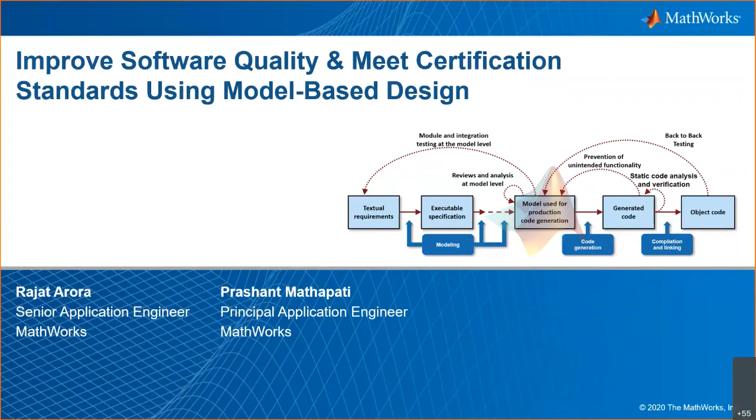Rajat, you're not audible right now. Yeah, now it's good. Is it fine? I have a weak internet connection at this point, so let me know if I'm audible fine. Yeah, sure, now it looks good. Continue, please.

Okay, so like I was saying, one of the biggest challenges we're seeing is that the technologies around us are maturing and coming up at an exponential speed, and at the same time we have to meet a lot of standards that are cutting across our industries, whether it be ISO 26262 in automotive, DO 178C in aero, or other standards for other industries.

All of these projects, especially the safety critical ones, tend to be more costly over time because they don't just involve the regular process of developing the software or final product, but also involve making sure the product, whether software, hardware, or a combination, is safety relevant and handles all the safety critical use cases the system might encounter. This makes our projects more critical, and we need to make sure they are defect free.

We've also seen this over time, and there's a NASA study on the same, that the later you find defects in your process, the more the cost of fixing them increases.

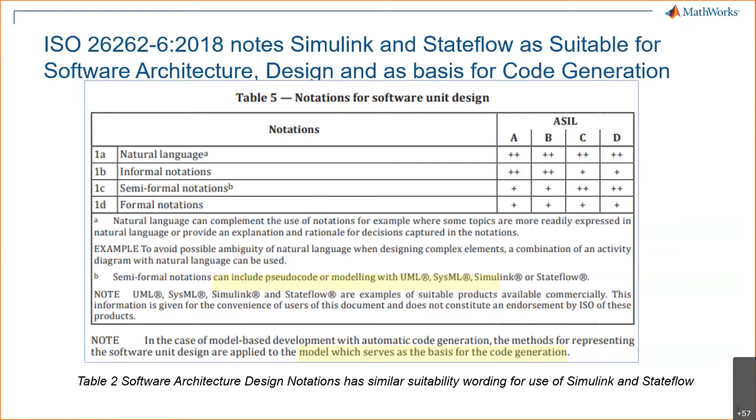So how then can we proceed when it comes to ISO 26262, and where does Simulink and model-based design apply when it comes to ISO 26262? As we all know, in terms of ISO 26262, the entire standard is divided into 12 chapters.

And mostly the most relevant chapters, as you can see in front of you, are chapters 4, 5, 6, 8, and 11 from a model-based design point of view. Primarily, chapters like chapter 6 are the most important and most relevant from a model-based environment point of view. And that's what I'm going to cover as part of today's talk as I move on.

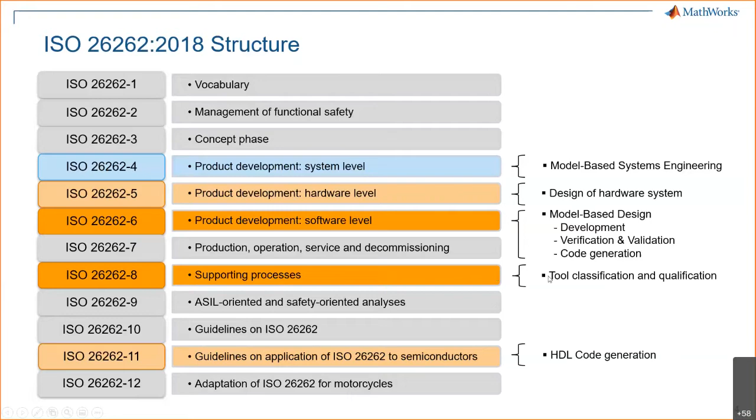But along with that, another area which is of utmost importance, both from an ISO point of view and from a tool vendor point of view, is how we support you in the entire process of developing a product or software compliant to ISO 26262. That is basically by providing you all the relevant artifacts and documentation required so that the tools you use from MathWorks can be easily qualified for your particular projects following the ISO 26262 standard. So that is another part I'll be talking about later, which is the tool classification and qualification part.

So let's first do a quick deep dive into the ISO 26262 chapter 6 coverage that we have. We all know that the ISO documents, especially chapter 6, is full of tables which specify how you are supposed to go ahead with your process of software development, whether at the unit level, the architecture level, the implementation step, or the testing step. All these details are provided by ISO in the form of these tables, and these tables are also partitioned according to the ASIL levels.

So not all components would be at the same ASIL levels. The lowest would be at A, and the highest or most critical at D level. As you can see, there are about 15 or so tables inside the chapter 6 document, and each of these tables have their own subsections, or you can say sub-guidelines, into it.

As you can see, one of the tables I have over here is table 9, which talks about structural coverage metrics at software unit level verification basically. And again, this is just one of the tables. There are many such tables in the ISO document.

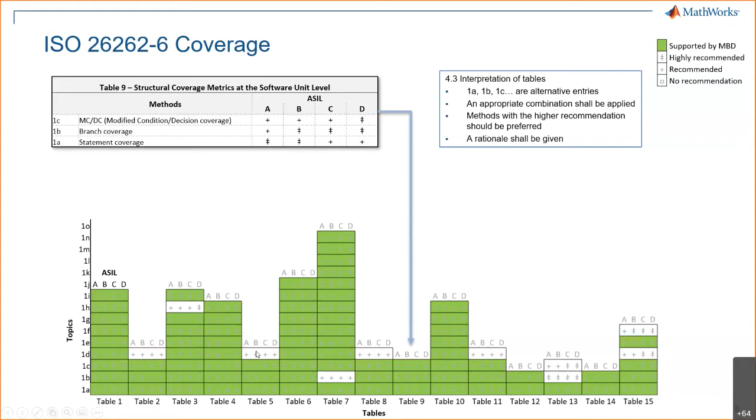And essentially, if we do a deep dive into these tables, we'll realize most of them are not relevant from a Simulink or software perspective that MathWorks is providing. So one of the tables is table 2, point number 1D, which talks about formal notations. Simulink is a semi-formal notation language, so it does not qualify this one. But again, this is not a hard-coded requirement, it's a recommended requirement.

And then there are some other points that require more manual intervention, even from an ISO point of view. For example, there is something called pair programming, which requires some sort of manual intervention. And then there is error guessing required in table 8, point 1D. Again, this is something which requires manual intervention.

There are a few other points or tables which again do not fit exactly into the software tools area, but can be achieved outside of the MathWorks tools environment, which is basically like using ECU network and the complete infrastructure to test some of these things, and also even doing vehicle-level testing. So these are few things where we do not play a role, but in most of the other cases, we have a clear-cut role to play and we support in most of these areas.

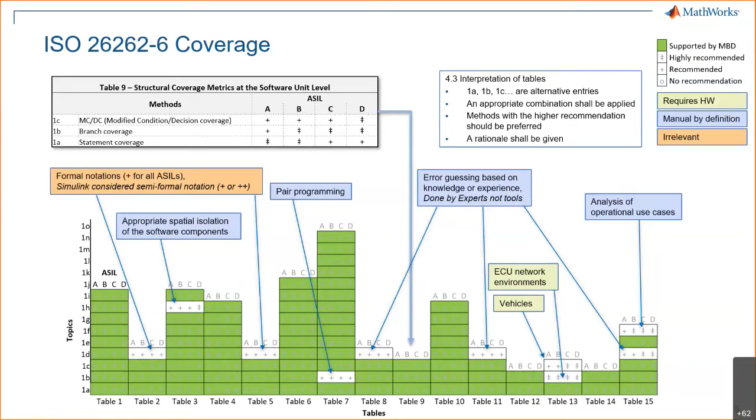Moving forward from here, not just ISO 26262 - MathWorks and the products that run on top of MATLAB and Simulink, by using these products, we support all the other standards that are there for different industries as well. So apart from ISO 26262, there are other standards for other industries like DO-178C, which is relevant for aero, and a lot of other standards. For most of these standards, along with ISO, we provide something called a certification kit.

Now, the certification kit, basically the IEC certification kit from an ISO perspective, will provide us with all the relevant artifacts required to qualify the tool and qualify the process that has been used via these tools to develop the entire software for the product that you're developing. So it has all those artifacts, so that at the end of the day, when you have used all the products as part of the workflow, you can run the artifacts.

So there are use case test cases that can be executed, and finally you would get a report out of this, and this report can be submitted to the auditors so that you can get your tool also certified at the same time. Again, we understand it is hard to digest this straight away. But to give you more confidence, we have also done a pre-qualification kind of a thing at our end.

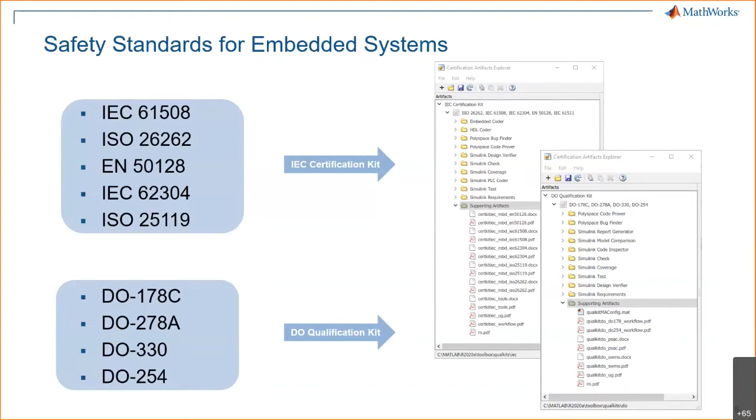So most of the tools that are used in the ISO 26262 process that you would be encountering, and I'll be talking about as I go ahead, have been pre-qualified already by TÜV for most of the ISO development ASIL levels. And I'll be talking about at what TCL level they are at a later point of time. And similarly, it is also relevant for the DO qualification kit, and the products that are used in the DO workflows. Okay, now this was about ISO and how we support ISO by providing these cert kits.

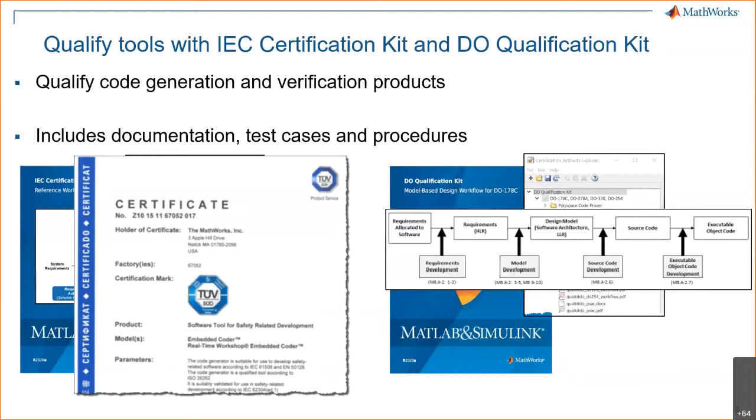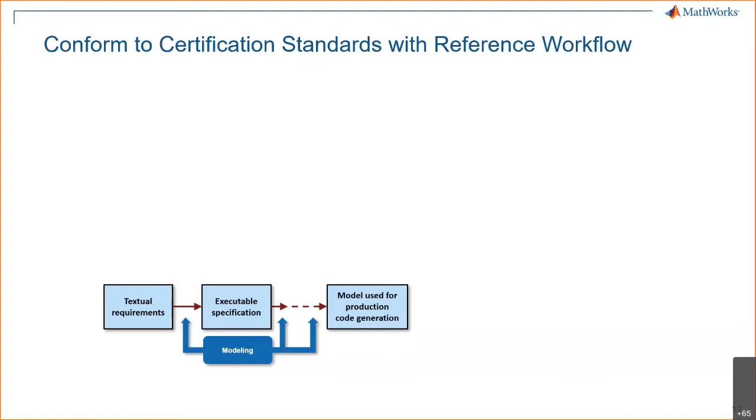We have created this model, and now we will start verifying this model and making sure that this model meets exactly what our textual requirements had asked us to do. And this can be done both at the unit as well as at the integration level also.

And once you have analyzed that your model, which is now ready for code generation, is meeting all your requirements, you would also make sure that the model that you have prepared follows certain guidelines or certain best practices that are required for developing the models, and that are required to ensure that the code that gets generated is the best possible code that you can get, and also follows the guidelines. Now, once you have done this, you can move to the next step where you would generate the code.

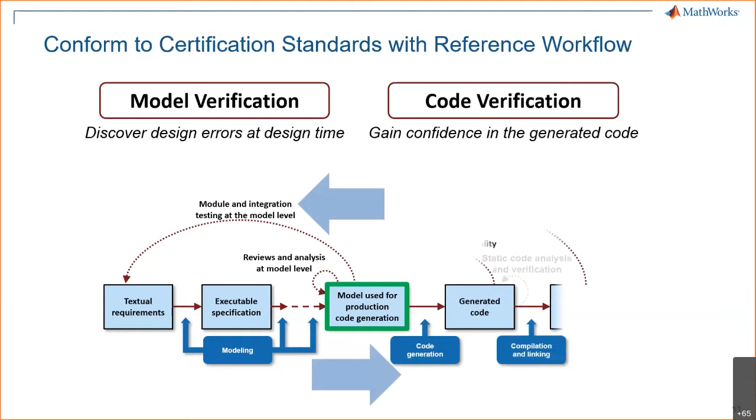And again, the process doesn't stop there. The generated code will again then be back-checked with the model that you had developed earlier. And both the model and the generated code will be validated against each other using the same test cases that you had earlier used to validate your model. And if the generated code gives the same results as the model, then you can essentially say that your code generation process is a success.

And at the same time, you would also be doing some sort of static code analysis and static verification on the generated code, which will basically ensure that your generated code is following the guidelines that are required. Okay. So this is typically a reference workflow that is used in the industry or organizations which are using model-based design, and is also a reference workflow that TÜV SÜD has accepted for development of ISO 26262 software using model-based design.

So let's have a deep dive into this workflow and see how each of these steps can be done inside model-based design or inside MATLAB and its related products. So let's look at the first side of things, which deals with model verification. Okay, so I'll continue, sorry.

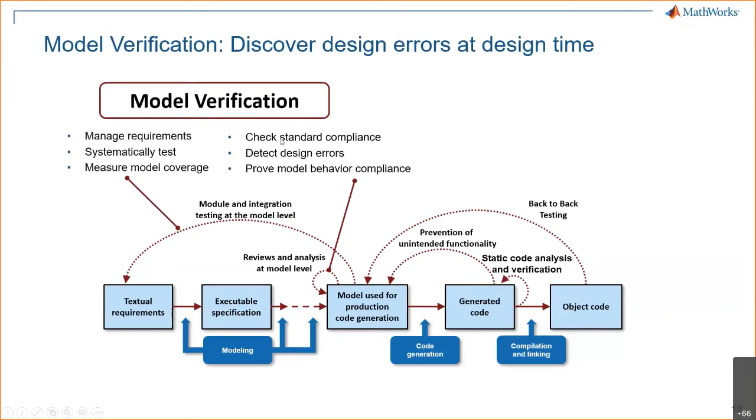So model verification, like I said earlier, encompasses 3 to 4 kinds of primary things that you would be doing. These are managing the requirements, making sure that the design is working according to the requirements, measuring how much of your design has been tested, and making sure that the model that you're developing is according to certain standards and does not misbehave in any scenario whatsoever. This forms the model verification part, and this is what we will start off with in this workflow.

On the other side of things is the code verification, which deals with things like making sure that the generated code matches the model results, or both of them give exactly the same results. And again, you get full coverage, making sure that the entire generated code is tested, and also making sure that the generated code is free from any defects, and it also follows guidelines like MISRA. This forms the code verification side of things. So let's start with the first piece, which is managing the requirements.

So inside Simulink, and primarily using Simulink Requirements, you can ensure that all requirements are implemented. You can even create the requirements inside Simulink itself, so you no longer have to go to a third-party environment to author the requirements. You can author the requirements inside Simulink Requirements itself. And at the same time, you can ensure that these requirements are linked with the models and the code and the test cases that you are later on going to create.

So let's see how this process works. So like I said earlier, typically Simulink Requirements would be your central tool, which will help you in working with requirements.

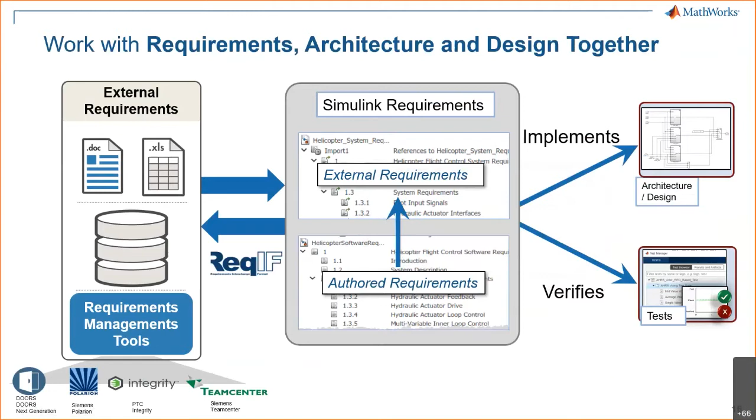And like I said earlier, you can basically link all these requirements via Simulink Requirements back to your design, to your architectures, and to your test case, and even go on and link all these requirements automatically with the generated code too.

And let's say if you have pulled in the requirements from some third-party environment, which is like a doc or an Excel or some of the third-party tools, and let's say you have updated them inside Simulink Requirements or inside the Simulink interface, and you want to take these updates back into your original tool that you might be using, then we provide a seamless mechanism to do this via the help of ReqIF exchange format. This is a kind of a file format that is very popular amongst all the requirement management tools, and most of the requirement management tools do support this. Okay, so we can easily exchange the requirements between your third-party tools and Simulink Requirements via ReqIF if that's the use case.

And on the other side, if there are any mismatch of the requirements and the design, or if there are pieces in the design that are not linked, or if there are pieces in the test cases that are not linked with the requirements, you can easily again validate that and see why are they not linked, or if the requirements have moved, or if there was no requirement for that particular design piece or the test case.

Okay, so I have a quick video demo to demonstrate how this entire requirement management piece works. So let me just start this video.

Okay, I don't know, for some reason this is, oops. Okay. Okay, this is strange. Let me just see if it works. Okay, I don't know why this is not working. This is strange for me. Okay, sorry about that. I don't know why this video is not playing. So I might need to skip over it. Yes, unfortunately it is not, but quickly I can still use the screenshot to explain you. Let me just give it a final try. Okay, I apologize for this. I really don't know what's going wrong over here, but let me use this screenshot itself to explain you.

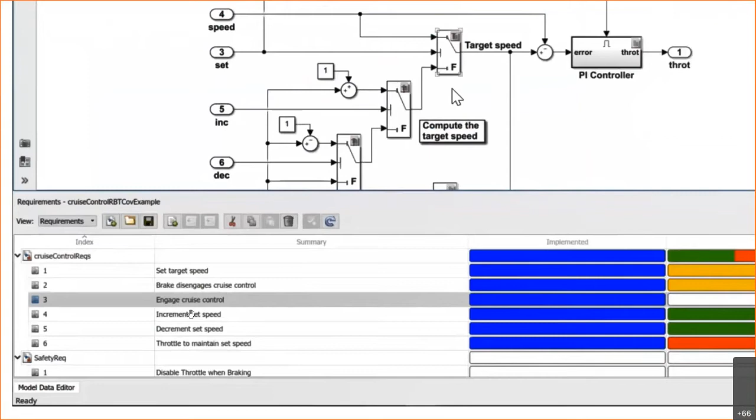Now, if I want to link any of these requirements to any of the pieces in my model, all I would have to do is just drag and drop this onto any of the pieces in the model. It's as easy as that. So I would just select this. For example, in this case, engage cruise control is selected. I would just drag and drop this, for example, on an AND, and the requirement would be linked with the design or the model that I'm developing.

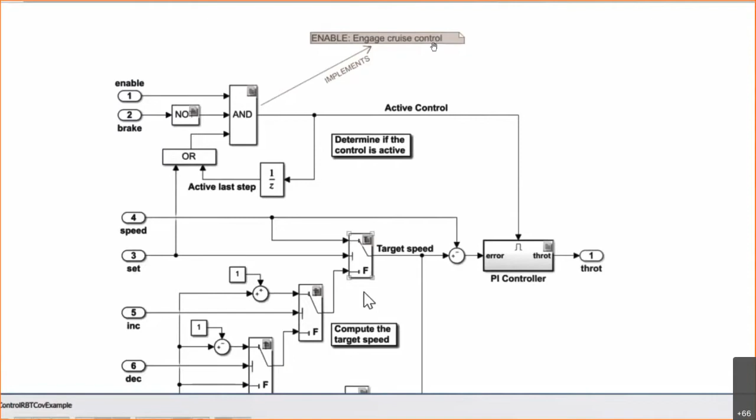At the same time, once the requirement has been linked with a particular element in the model, you would see that it will have these banners or these gray icons that are appearing on the blocks. So for example, on this AND block, if you see, there is a banner or a gray icon that is appearing. And if you would just click on this gray icon or the banner, it will show you what particular requirement is being implemented by this AND block. So in this case, this AND block implements engage cruise control requirement.

And if I just zoom out again, if you want further details about the requirement and what are the finer details of this requirement, on the right hand side, which is slightly cut out in the screenshot, sorry about that again, you would see the description of the requirement in detail. So that would be also there.

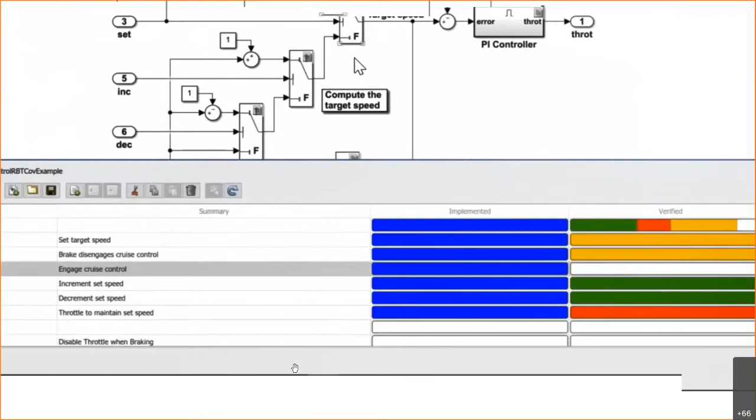And finally, the moment you start linking the requirements back with the model, you would start seeing the status of the implementation bar changing. So if a particular requirement is not linked with the model, it would show a blank status, meaning that no model element is linked with this requirement.

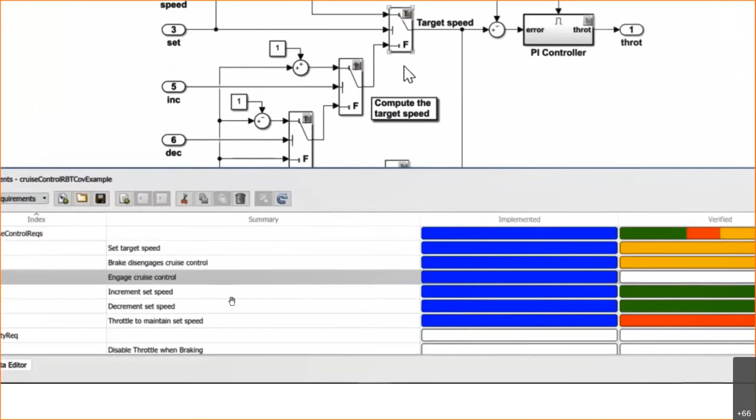And on the other side also, it shows the verification link. Basically, it shows whether a particular requirement is linked to a test case or not. So for example, in this case, engage cruise control is a requirement which is not linked with a test case. And in cases where the requirements are linked with the test cases, if the test cases are not executed, you will get a yellow kind of a display.

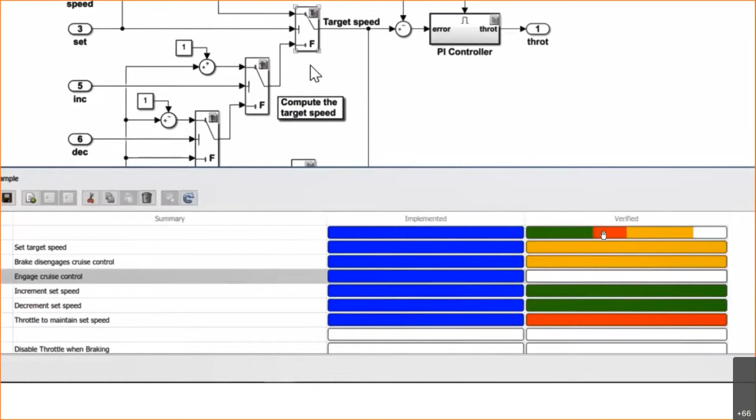But in cases where the test cases have been executed on the model, if they have passed, it will show green. If they have failed, it will show red. So in this case, if you see the sum total, it is showing that a few test cases have passed, a few have failed, and a few have still not been executed. And on the bottom over here, you would also see the links appearing for all the requirements. So this is how the requirement linking and traceability process works.

Let me just see if I can go ahead. Yes. So like I said, you can link the test cases back with the requirements, as I showed you earlier, and you get different verification statuses right here in the progress bar. And each color has its own notation: pass, fail, unexecuted, and missing.

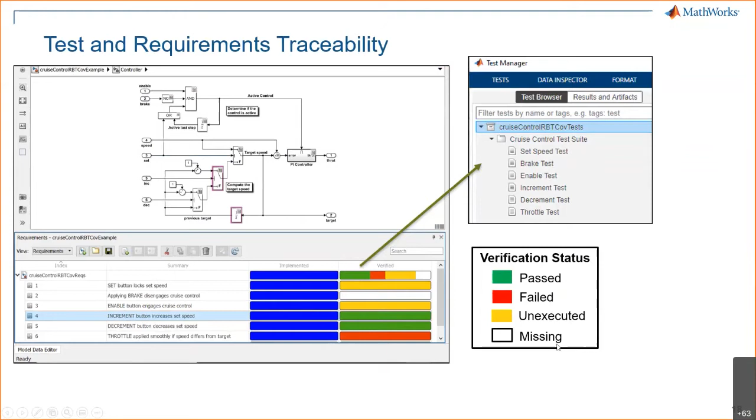Furthermore, when you see that a requirement is missing a link with the test case, starting with 2020A, we came up with something called a traceability matrix. This video, I don't know, all my videos are not working. So it gives me a matrix kind of view where I can populate all my test cases against all the requirements, or all my model elements against the requirements, and see which pieces are linked or not. So it's like an X and Y kind of matrix.

And I can see what pieces of the requirements are linked with the test case, or with the model or not. And if there are any missing pieces, I can directly establish the link from the traceability matrix itself. So for example, in this case, the brake requirement is not linked to a brake test case. What I can easily do is just double click on this and link it with the test case that I have already authored.

So this is again a very useful view, because as our projects and models start getting complex, it becomes hard to manage all these traceabilities in a single place. So this traceability matrix gives you the flexibility to visualize all the links established between the model, the requirements, and the test cases. And if you see any gaps in the traceability matrix, you can close those gaps, or review them and analyze why they are present in the first place. Let me just move forward with this.

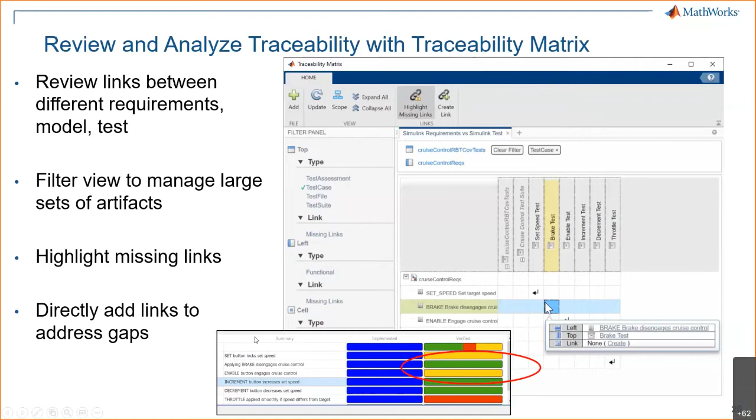So now we have seen how you can work with the requirements, the model, and the test cases. Now let's quickly look at how you can author the test cases. If you are on model-based design and using Simulink Test, you should be able to create an automated functional testing framework that is well integrated with all the tools inside a model-based environment, helping you do verification and validation of your models. This will help you run the test cases, find out which are passing or failing, and what coverage you are getting.

And finally, when you are working on large projects and large software systems, you can also execute all these test cases created via Simulink Test on continuous integration platforms like Jenkins. So all the test cases can be automatically executed on Jenkins or other CI platforms. So let's look at how this automated framework can be executed on the model.

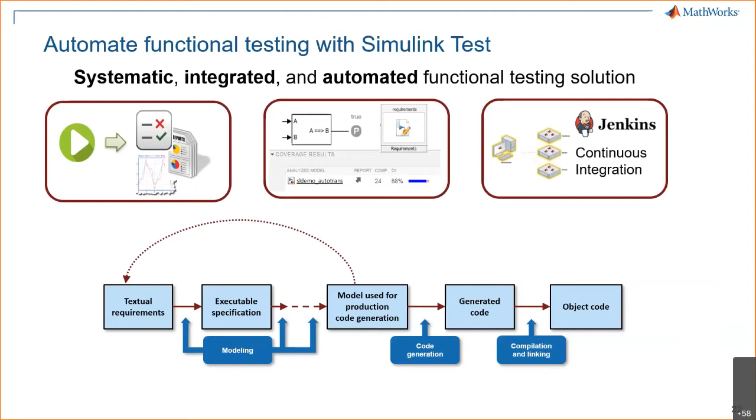So let's say you had certain functional requirements out of which you created a model. This model can be created in Simulink, Stateflow, or it can even be an architecture model linked further with an implementation model. So any of those three can work. So let's say you have created this model. Now you want to test this.

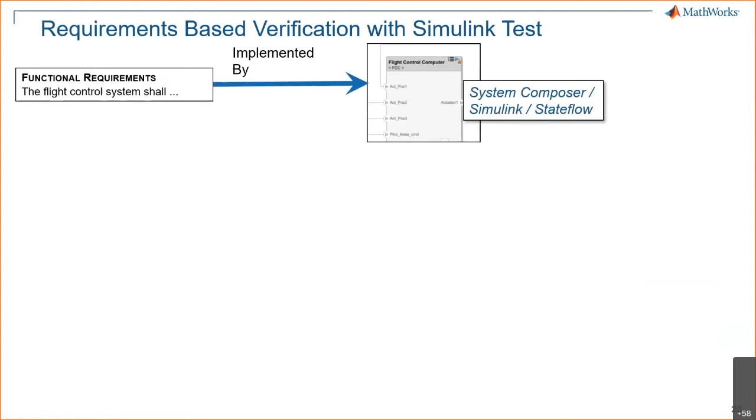So via Simulink test, you can first create a harness environment for this particular model. Basically, a harness is an isolated environment that will help you in testing the model or the design you have just created without altering your actual design in any way. You wouldn't have to change your actual implementation, but you would have an alternate, isolated environment where you can test the model or design as a standalone. This is what we call a test harness environment.

Once you have created this test harness environment, the next obvious step is to create the test cases. There are various methods, like using Excel, using a signal editor block inside Simulink, and even using a Simulink test sequence block inside Simulink test to create your inputs. At the assessment or output side of things, you can again use Excel test assessments and unit test frameworks to validate the outputs. So this is how you can easily create an automated environment for testing the models or designs you have created from your functional requirements.

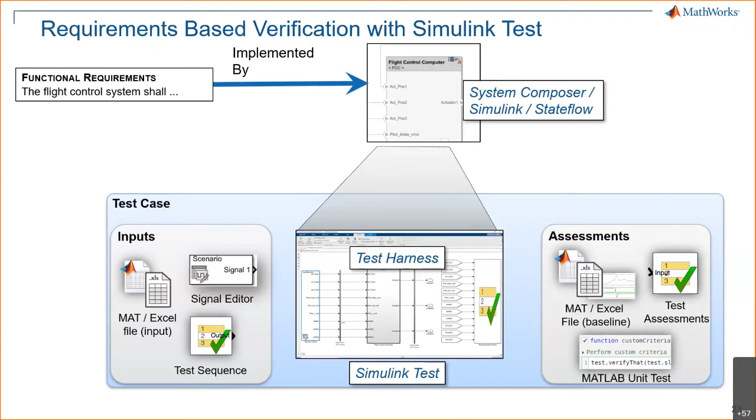But like I said, the process doesn't stop here. From an ISO perspective, everything needs to be linked back with the requirements. All these test cases that you're developing inside Simulink test can be linked with the functional requirements using which you had developed the design. Once you have done this, when you execute all of this together, you would also be able to collect the model coverages.

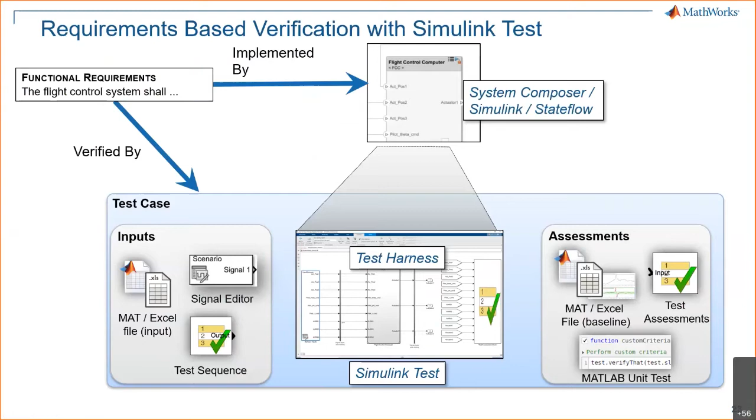So if I just go ahead, once you have created all the test cases inside Simulink test, the next obvious step is basically to execute these test cases on the model. And at the end of this execution, you would be able to collect or measure the coverages of these test cases back on the model.

Also, at the end of the day, the most important thing would be to generate coverage reports, and that can again be easily done just by a button click. You would be able to generate coverage reports that can then be submitted to the auditors for your ISO 26262 process.

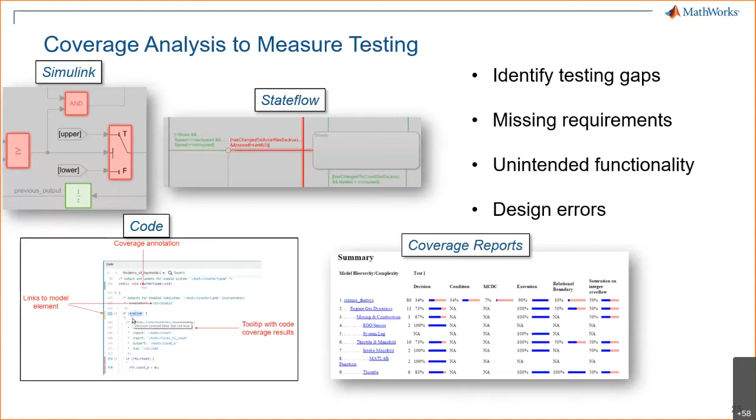Moving forward, there is a strong need, especially when people are doing coverage-based testing, to prove that the coverage obtained on the model from a particular test case actually belongs to that test case and is not unrelated coverage. It is not random coverage, but there was actually a functional or requirement-based test case that helped you cover that piece of block or logic in the model. This is again a very necessary requirement from an aerospace or DO-178C kind of development platform or standard, and is also now widely used in ISO.

So what is happening here? Starting from version 2020A, we can tell you whether the coverage obtained on a particular piece of the model came from a test case that was linked with a requirement, or from a test case that was not linked. So whether the coverage you got was related, intended coverage, or simply a coverage that was unrelated.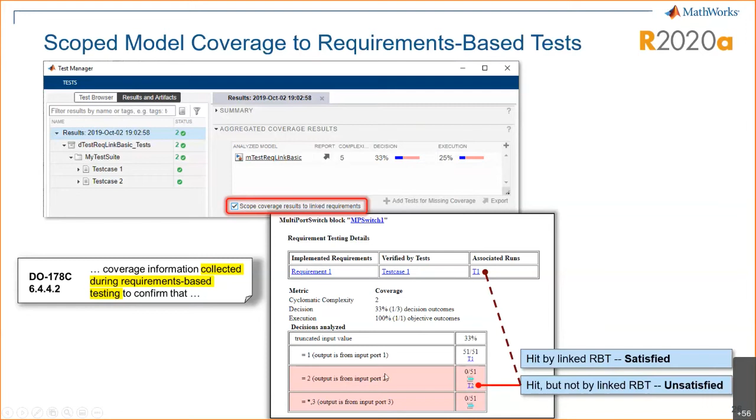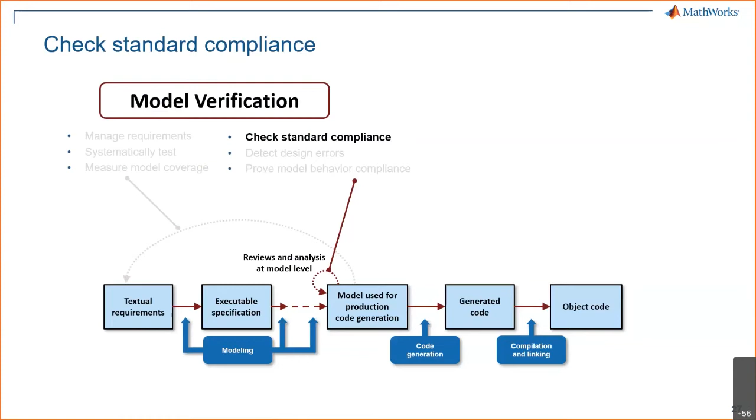Moving forward, now that we have done the testing, managed the requirements, and measured the coverage, another thing that can be performed on the model itself is making sure that the models we are developing follow certain guidelines, standards, and practices. For this, we provide something called Model Advisor via Simulink Check, which helps you run these standard guidelines and checks on the model so you can say that the model you've developed is following certain best practices of the industry.

What are these standard checks that most organizations follow? Here is a list of built-in checks that a lot of customers follow, and these are some of the checks we also provide as part of the shipping product. These include DO178 checks, ISO 26262 checks, MISRA C checks, CERT-C, and a lot of others. The most popular ones, especially from an automotive perspective, are ISO 26262, MISRA, and MAB checks.

MAB stands for MathWorks Advisory Board checks, given to us as part of our long-term collaboration with customers, who have shared back some of the best practices which we have put into the form of checks. You can execute these checks on the model to verify that your models are following the best standards and practices of model-based design.

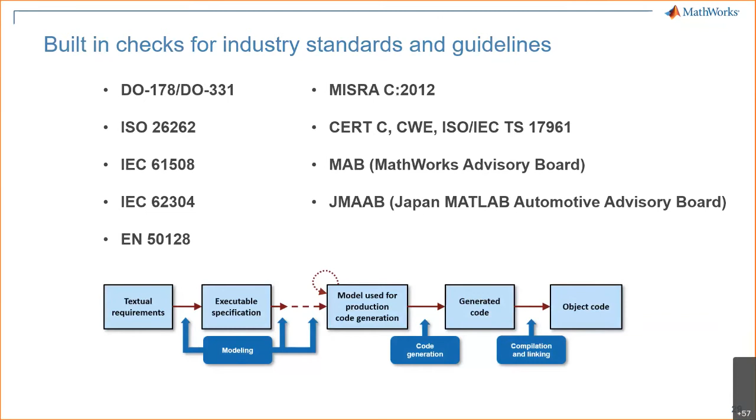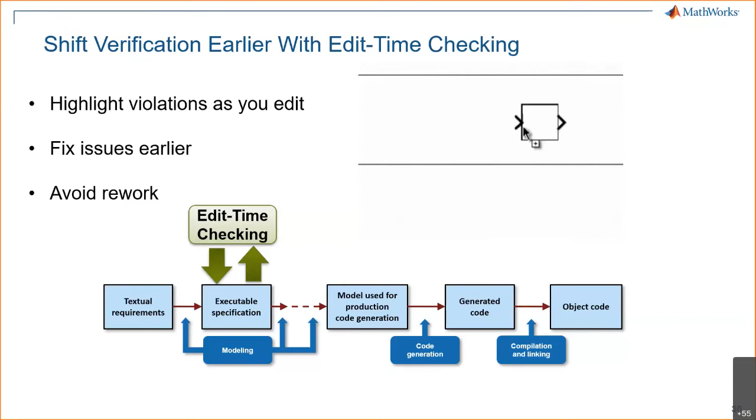Moving on, you can also do something called edit time checking. This is when, during development of the model, if there are any violations of best practices, it will tell you then and there itself. You don't have to wait to finish the model and then run the check. Instead, as you are developing the model, if some of these checks are failing, they will be flagged then and there, so you don't necessarily have to wait till the completion of your model.

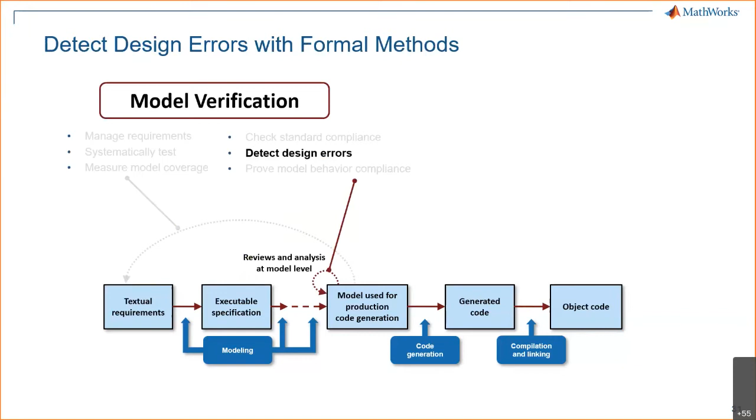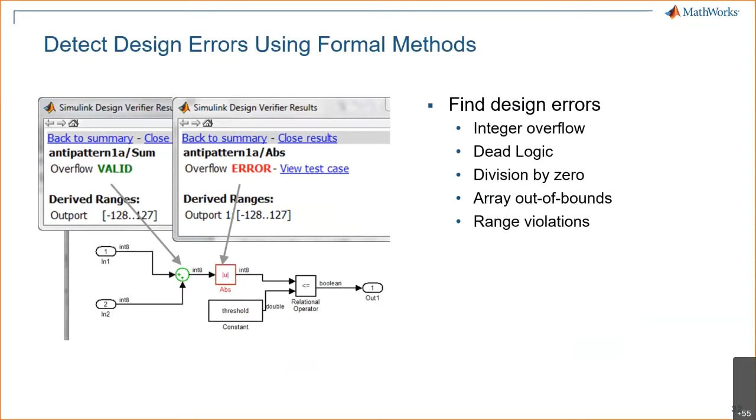So with that, we come to the next step of checking the model. From a design or robustness point of view, you can use a very advanced mathematical checking method called formal methods, to make sure your design is free from certain errors like integer overflow, dead logic, division by zero, array out of bounds, and so on. This helps you find out whether your design is robust enough and whether it has some of these flaws. If it finds errors like integer overflows or dead logic, it will also generate a counter example so you can reproduce and see the error yourself.

A lot of times when working with customers, they say, okay, we see there is a division by zero possibility in the model, but we don't have a test case to create that division by zero possibility. In that case, people can use Simulink Design Verifier, which helps identify this division by zero and, at the same time, gives you a counter example, since the models are huge. It will produce a counter test case using which you can run that test case on the model and see for yourself how that division by zero might occur. This is valid for most errors that can be checked by Simulink Design Verifier.

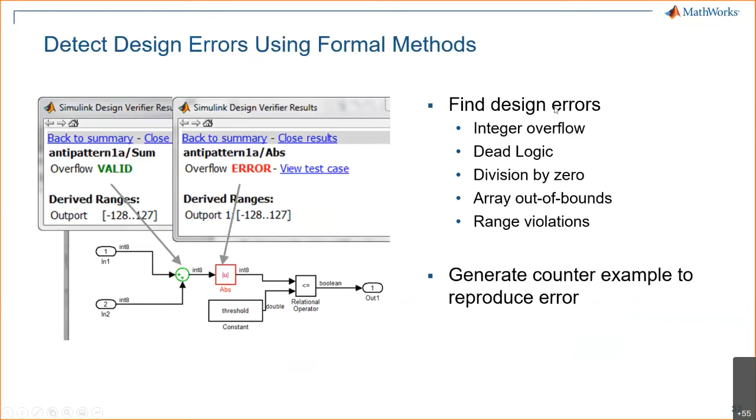Finally, we come to the last piece of model verification and model checking: making sure that your design always meets the requirements. This is where we run a methodology called property proving, where we try to prove that the model behavior is always in line with your requirements.

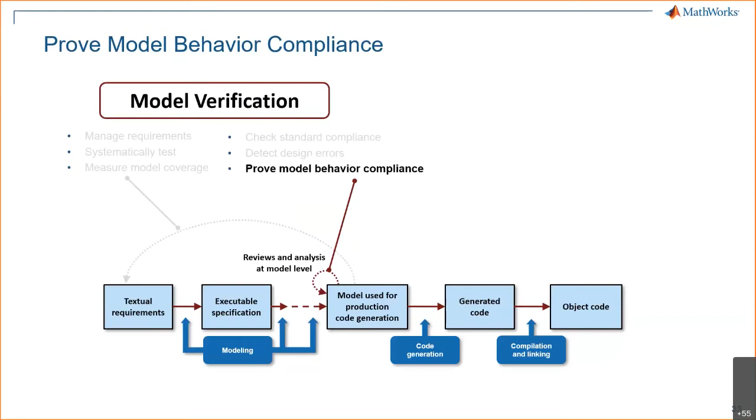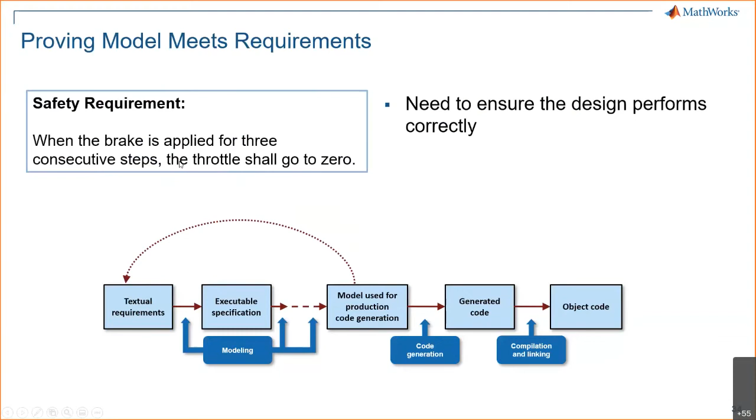This is very relevant for some of the safety critical testing you might be doing in your applications. So let's assume a scenario: I have a safety requirement which says that when the brake is applied for 3 consecutive steps, the throttle shall go to 0. That's an absolute safety critical requirement. Now I need to make sure that the design I'm creating would never deviate from this safety requirement in any scenario. So how do I realize this particular scenario in my system?

What I would do is, as you can see on the top piece, which is again a cruise control logic, is my actual design. And below is the safety property. What is that safety property? It's the requirement, in the form of a model.

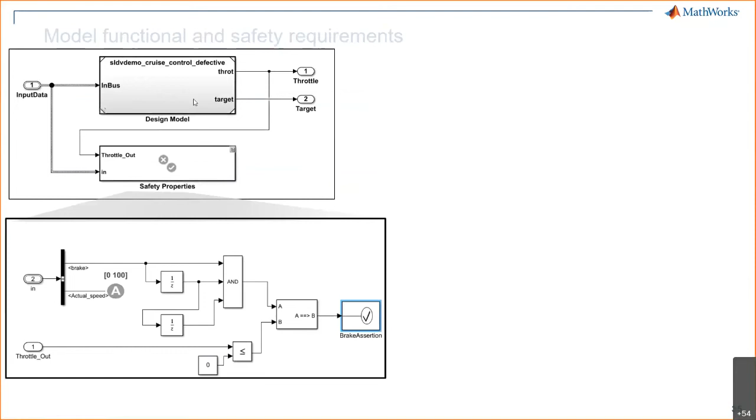So the safety property is basically that the brake for 3 consecutive steps should not reach a certain value. This is my safety requirement, which will be executed along with the model or design that you have just developed. Then the tool will try to find cases where your design would violate this property that was defined as a safety critical property.

Once it finds out that your design or model has a chance of violating this safety requirement, it will give you a counter example using which you can reproduce the same behavior on your actual model and see for yourself what is going wrong in your design model.

This is a very, very robust kind of testing that can be performed. We typically recommend it be done on safety critical properties, because doing it on all properties might not be possible from a time and effort point of view. But if it can be performed from a safety point of view, it will add a lot of value to the software we are trying to develop.

Moving forward, till now we have seen the model that could have been used for code generation. We have tested it completely, we are now fully satisfied, we have gained enough confidence in the model, and we have produced all the artifacts from testing this model. Now we can proceed towards the auto code piece.

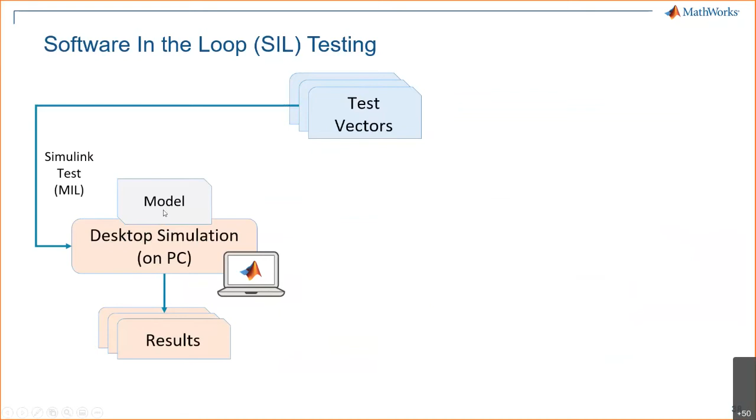You would have executed certain test cases on the model, which we call MIL in a model-based environment. Once you have executed this, you would have results. Now you would generate the code out of your model. Once generated, you can compile the code on your host and run the same test vectors on the compiled code, then compare the results of the model and the code.

If the results of both are the same, you can essentially say the model-to-code conversion process is correct and does not have any functional errors. This shows there is an equivalence between the model and the code. You also get to know how much execution time your code is taking, and you are able to collect the code coverage at the end of this process.

The same process. Is there a question?

Okay, I think I'll continue. So at the end of this process, you would be also able to collect code coverage.

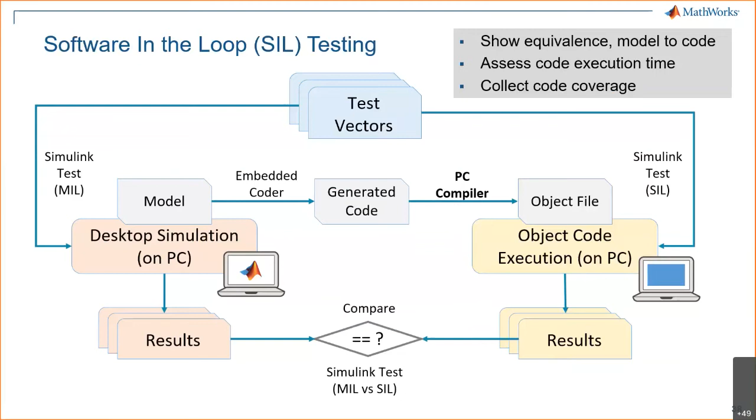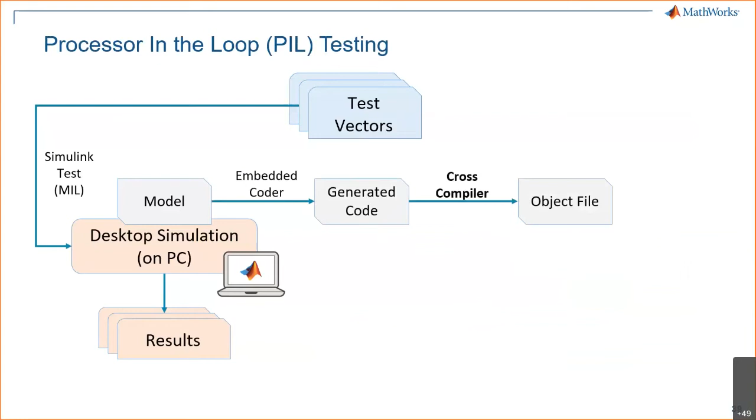The same process can also be repeated on your target hardware, where I can again generate the code, but in this case cross-compile the generated code and flash it as standalone onto my target hardware, then run the same test cases that are executed on the model, but this time on the code running on the target, and compare the results between the both. This gives me added confidence that even after cross compilation, my code on the target gives the same results. So that's another step that I can go and do.

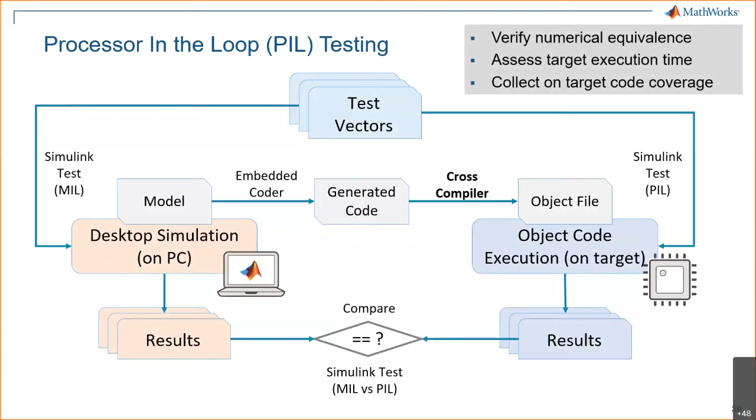Now at the end of this, again you can collect all the coverage, artifacts and reports, and henceforth prove that the model and the code are working perfectly in line with each other. There are other steps that can be taken, like doing a HIL or hardware-in-loop simulation if that is required for your process. It can again be automated using Simulink Test as a framework for testing the models.

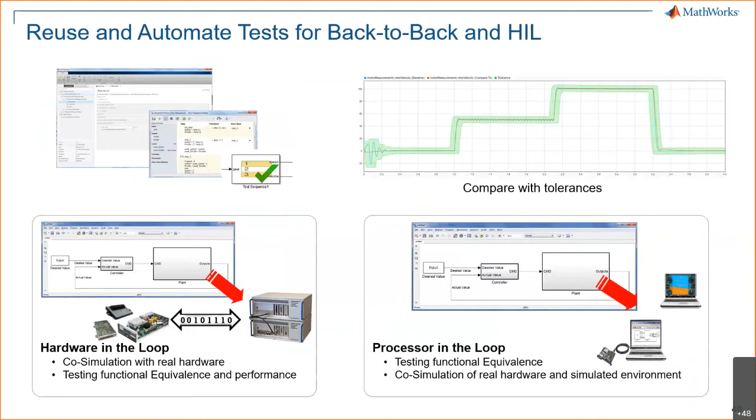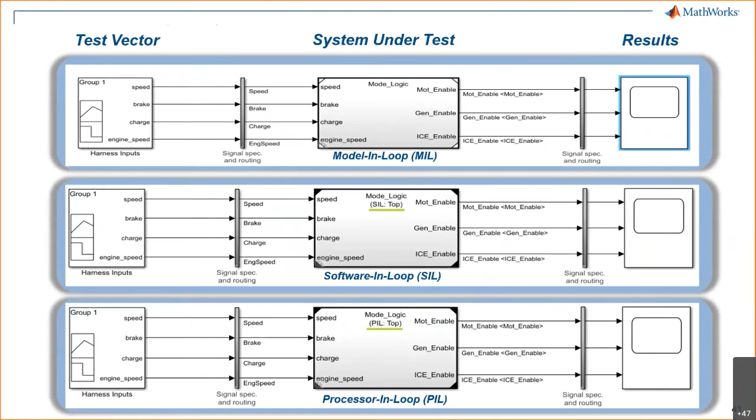So like I said earlier, at the end of all this testing, you would be able to get the coverages. And these coverages can be submitted to the auditors for collecting the relevant credits for doing the code coverage also.

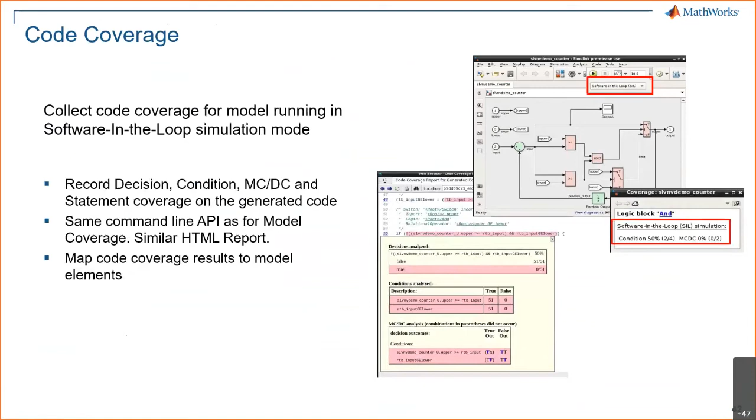Okay, so with this we come to the last piece of the verification of the code, which is doing runtime error detection of the generated code and also MISRA analysis. Though in this case we are talking about the generated code, most of these strategies are very well relevant even for hand code. So if you're typically working in just a hand-code based environment, you can use the same tools and the same set of strategies to perform MISRA analysis and runtime error detection.

This is primarily done by using something called Polyspace Bug Finder. So if you're working at a component or unit level, or basically at a developer level, you would be running Bug Finder, or Polyspace Bug Finder, to do static analysis. This static analysis would help you make sure that the code you have developed, whether it be generated code or hand code that the developer has written, is high quality and secure, and follows guidelines like MISRA and all.

It also gives you code complexity numbers if that is of importance to you, which in most cases it is. So you can also collect those metrics out of running the bug finder.

But if you want to run static code analysis on a larger code base or a bigger piece of software, then we would suggest you use Code Prover, which not only verifies or tells you how good your software is, but also tells you how robust your entire software is. Basically, it will tell you whether your software is free from critical runtime defects or vulnerabilities, and also produce artifacts that can be used for getting the credits for your certification.

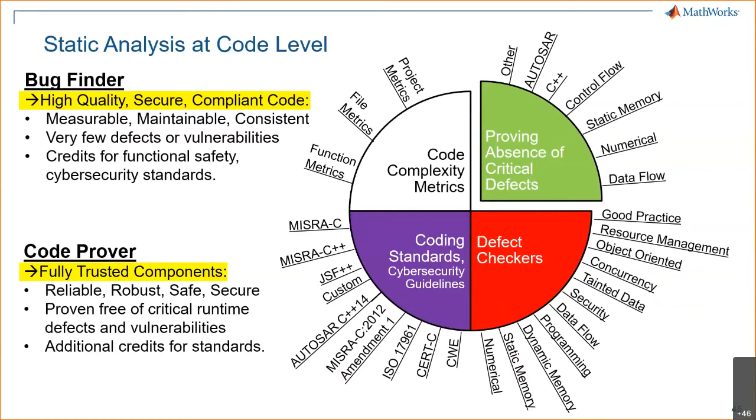So basically in this entire workflow that I just talked about, you would have used a lot of products in the process. So for all of these products, from an ISO perspective, you would be required to go through something called a tool qualification process. And to support you in this tool qualification process, we provide you something called a tool qualification kit, which has these different artifacts, as you can see. So this has the tool use case document, workflow conformance document, validation reports, tool classification reports, and all.

Using these artifacts, you can basically get the tools that you have used in this model-based design process qualified, by producing the final report, and get the relevant tool qualification credits for it. So if I quickly go ahead with the typical tool qualification process, you would first start with the tool classification aspect, where you would define the tool's use cases. And based on the tool's use cases, you would define the tool impact analysis.

So this impact would be basically whether the tool can introduce errors or fail to identify any defects. So this would basically comprise your tool impact. Based on the level of tool impact that you would have seen, you would define a tool error detection level. Basically, if there is a chance of an error to be introduced by the tool, can we know it before, or can we prevent it? On the basis of that, you would classify your tool error detection level.

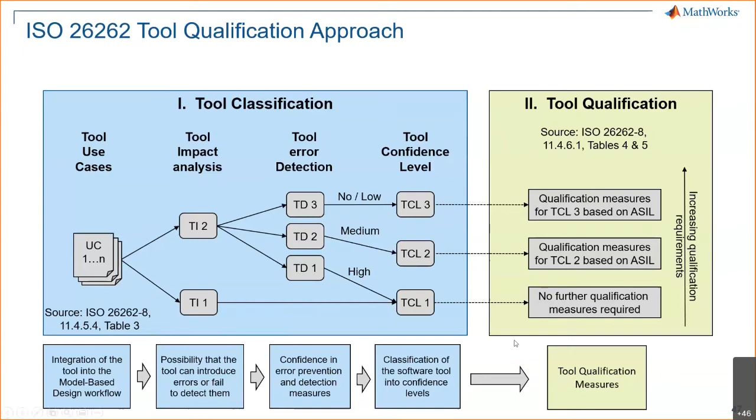So if you're following an ISO process, typically for a TCL2 and a TCL3 level, you need to follow at least one of the qualification methods as specified by this table. I don't exactly remember the table number, but there's a table which tells, based on the TCL level, what is the qualification method to be used. So you need to use at least one of the methods.

And in this case, for the model-based perspective, and based on the tool qualification kit that we provide you, we have already made steps B and C very much available to you. So evaluation of the tool development process and validation of the software tool can be easily done using the kit provided for the tools that I just talked about earlier.

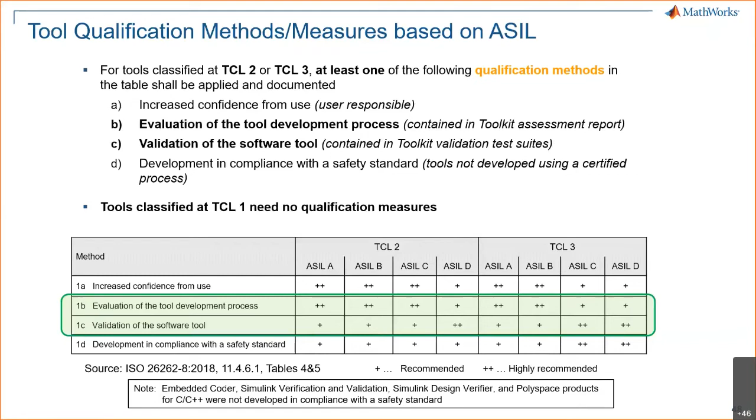Going ahead, like I said earlier at the very start, most of the tools that are used in the ISO 26262 process have been pre-certified by TÜV SÜD for the ISO development process. And here is an example of one of the tools which is the most critical tool in the entire process, which is Embedded Coder, MathWorks' code generation solution. It has been certified at TCL1 level.

If a particular workflow is followed, so there is a reference workflow that MathWorks suggests. If you follow that reference workflow in its entirety, then Embedded Coder can be put under TCL1 level, and you can practically go through without any further qualification required for Embedded Coder. But if you have certain deviations from that reference process, but still you're following more or less at a high level that entire reference workflow, then Embedded Coder would stand at TCL2 or TCL3 level. And in that case also, we provide you with the relevant artifacts so that you can qualify the tool for your certification process easily.

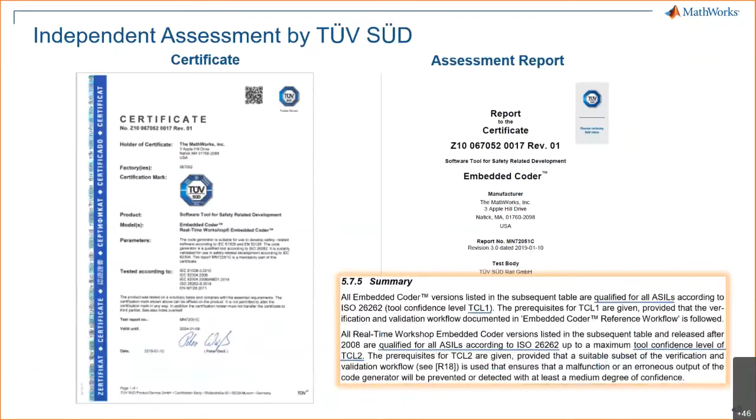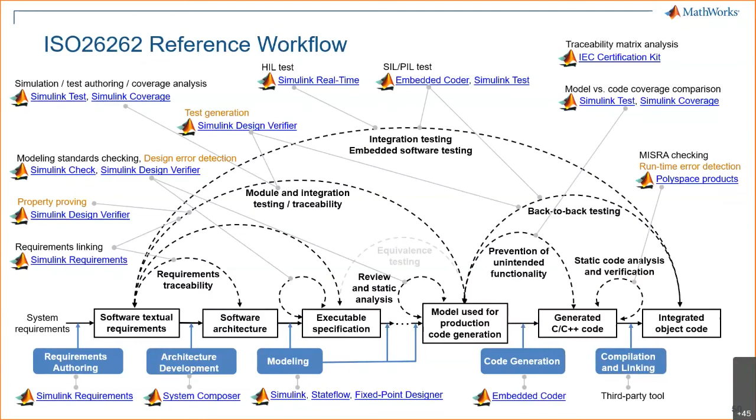Okay, so this is in general what I just wanted to discuss. And if I could summarize, this is the entire workflow. I know it kind of looks overwhelming at first, but this is in its entirety the ISO 26262 reference workflow, and all the tools that can be used at various steps based on the ISO's requirements. And this is the reference workflow that we have also got certified by TÜV SÜD to be used for ISO development.

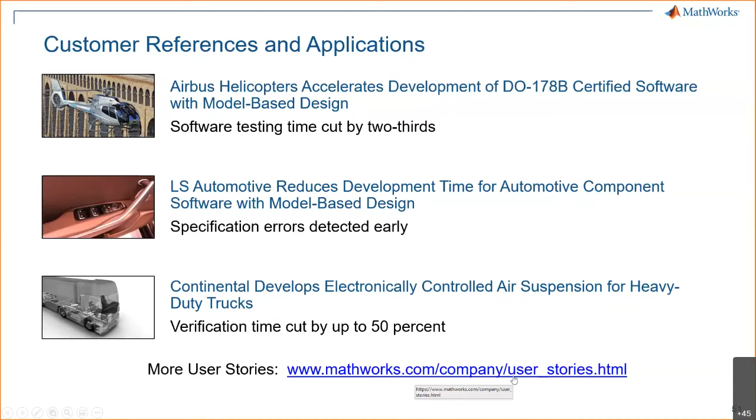Finally, if I could summarize, MathWorks provides pretty comprehensive support for ISO 26262 software development. And as you can see, there are different ways of how you can work with us, and there is a lot of information available.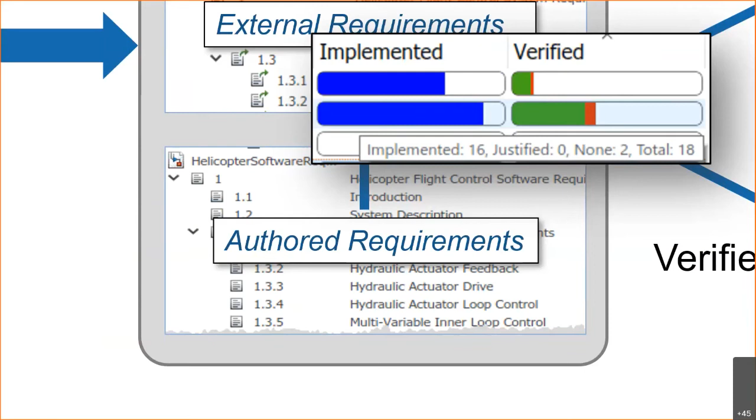So now it's up to you to check what that change is, whether it was the requirement that got changed or whether it was the model that got changed and you haven't really reflected it back onto your actual requirements. So yeah, that's how it will show you the change.

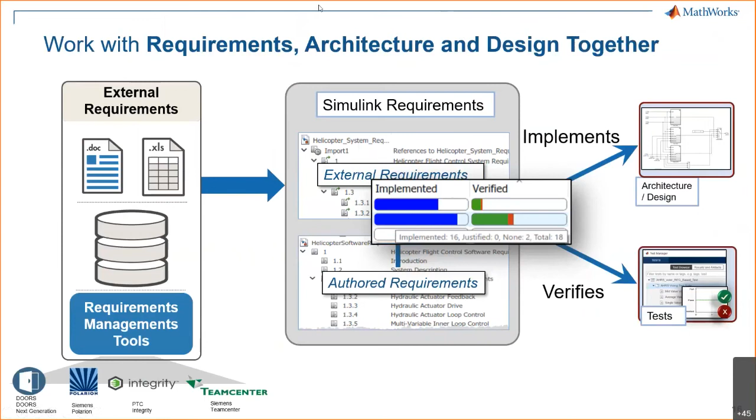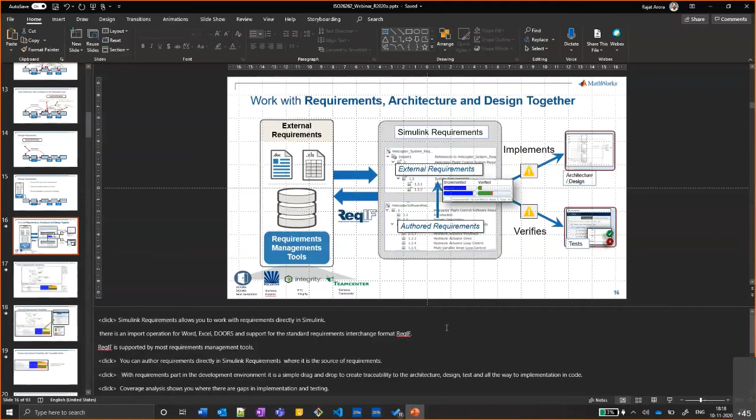Rajat, this is Nagraj here. You showed some design, right? Are these designs standard designs, or are they customized? Yes. So I guess you might be talking about this one that I have shown. Correct, correct.

Yeah, so the thing is, we typically don't give any designs as such, but we give you what are called reference applications. So for example, in this case it's a cruise control, so we would have a small reference cruise control application, which you can see and get an idea of how you have to model. But at the end of the day, yes, you can fully create from scratch.

You can create your own design, or if you feel that the design we have as part of the product suits your need and requires any tweaks, please feel free to tweak them. It's all up to you. So full flexibility is there for you to start from scratch, or if the references are useful for you, please use them. Yeah, no problems. Clear, Rajat. Thank you.

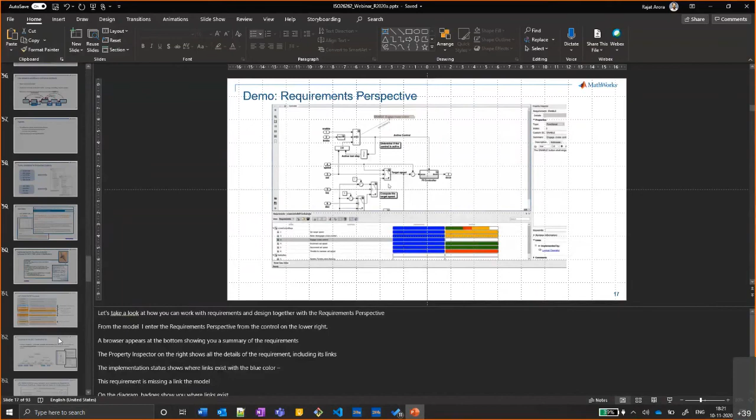Okay. So if we have a couple of minutes, what I can also share is one more thing, which I thought might be useful. Let me just see if I can pull it up. Just give me a second. It should be here. Meanwhile, if you have questions, feel free to jump in with the questions.

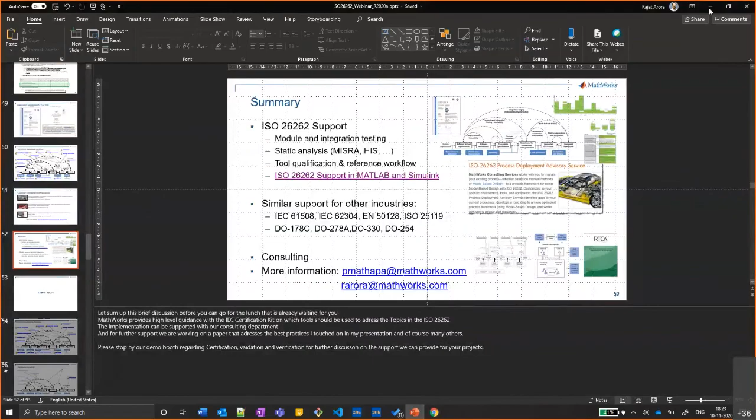And there are some webinars and a lot of videos available that you can also refer to. My tool will take some time to set up, but if you want to look into depths of how things work inside model-based design, head over to our webpage, mathworks.com. Go to the solutions page, go to ISO 26262, and there you'll find all this information. You can also simply search for videos to see how the product works.

Okay, now let me see if it is coming up. I have a super slow startup with the tool. It's because of my PC breathing its last breath, I would say. So unfortunately, it will take some time.

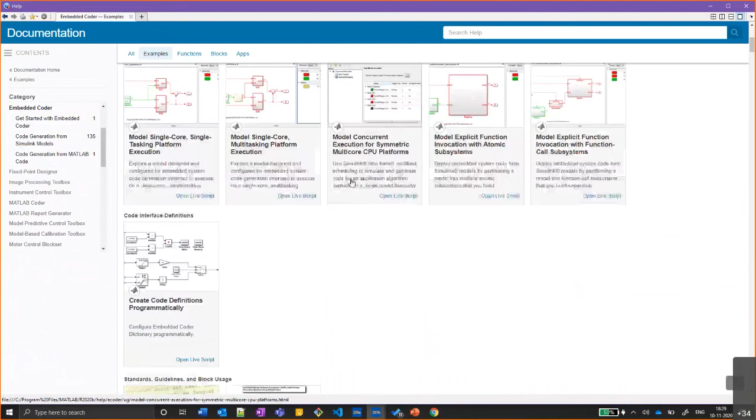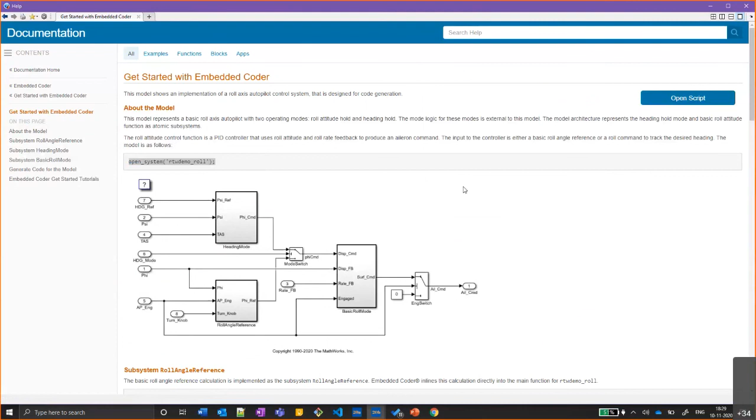Okay, so here is the environment. It is up and running now. Let me see if I can quickly open an example. If I go to code generation, for example, I can go to Embedded Coder, I can go to examples. Let me see if I can open. Okay, let's take this one. This one might be the simplest. It's starting up. It might take a few minutes to come up.

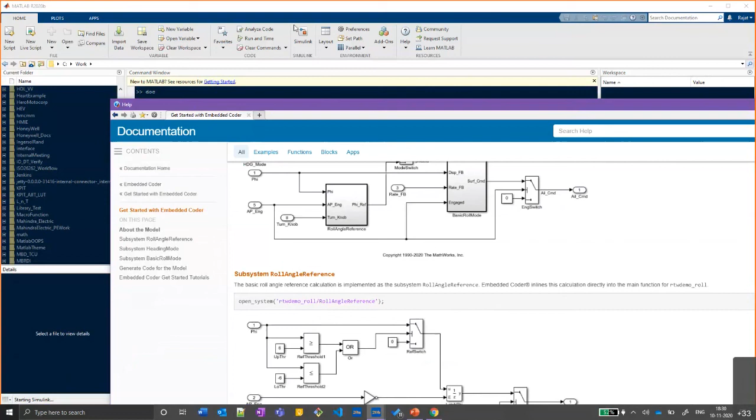Meanwhile, if there are any other questions, feel free. It's super slow with my PC. So yeah. Any other questions? Feel free. Yeah, I don't know. Okay, there it comes up.

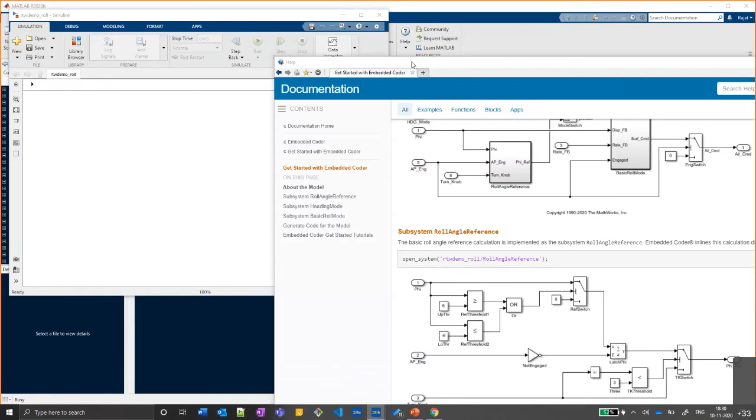So this is the model. This is a sample example that I was showing. And if you want, you can simulate this by clicking on the button. Right now, I think simulation was disabled for this model because it was setting up. Now I think it is enabled, so I can simulate it.

This is the logic that you can develop, and if you want, you can generate code out of it. You can simply traverse to the code generator, which is Embedded Coder in case of MATLAB. And in Embedded Coder, you can start the code generation process. Like I was saying, you can use the entire logic as is, but in almost 99.9% of the cases, people would develop their own logics and own modeling styles from scratch. So hope this helps.